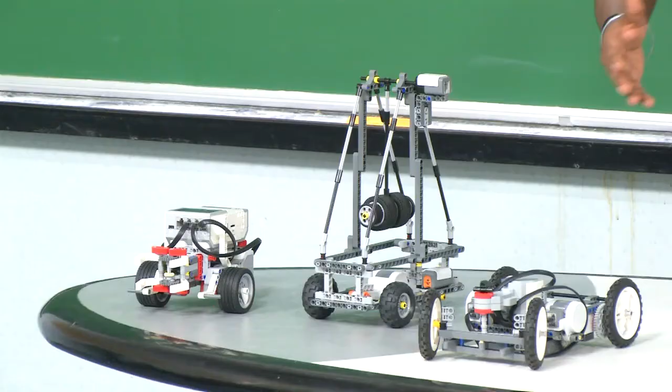In the following series of videos, I'll be explaining a few control systems lab experiments performed using the LEGO Mindstorms kits. These kits are highly reconfigurable and hence can be used to design various experiments across different domains. They are also not very expensive. Also, they are very portable and user-friendly. Thus, they can be taken by the students to their dormitories.

A creative student will be able to design his or her own experiments in order to get a more in-depth understanding of the curriculum. Also, these kits induce curiosity and excitement and thus provide for an enjoyable learning experience. The first experiment that we'll be looking at is controlling a servo motor using the LEGO Intelligent Brick.

So what is a motor? That's the first question that we must answer. A motor is a device, as you can see, that converts electrical energy into mechanical energy. A servo motor allows for precise control of the angular position using a rotary encoder for feedback.

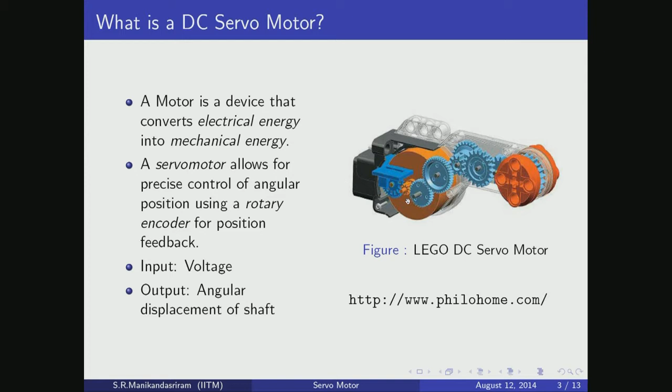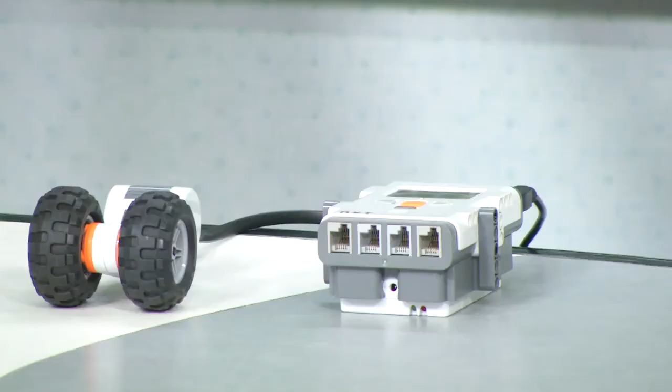Now, it is well known that a DC motor is a linear system. A linear system provides a sinusoidal output when excited using a sinusoidal input waveform, with perhaps magnitude scaling or phase shift. So, we need to verify that this motor is a linear system. In order to do that, we will write a Simulink program and run it on the NXT brick.

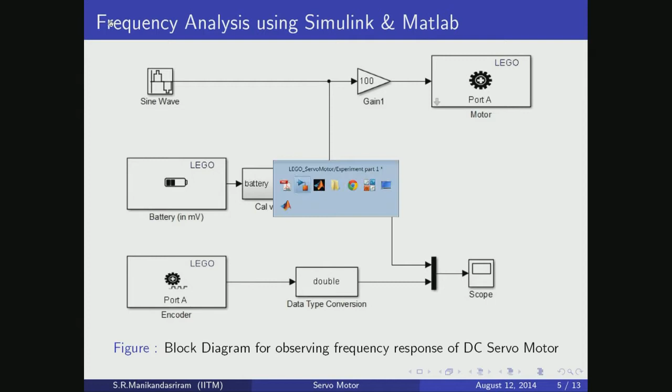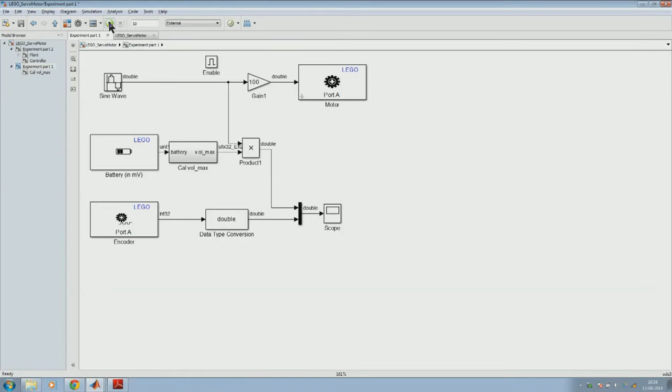So, let me show you the code in Simulink. As you can see here, we generate a sinusoidal waveform and give it to the motor. And we read this motor response and log it using the scope block. To run it on the device, first we will have to turn on the NXT brick using the orange button. Once it is on, we will have to press the play button in the Simulink program.

Now that we have completed the experiment, let us observe the results using a MATLAB plot. As you can see, there is magnitude scaling and there is a phase shift between the two sinusoidal waveforms. This proves that this is a linear system. We can repeat the same experiment for different values of frequencies and tabulate the results. With this data, we can obtain the Bode plot of this system.

As you can see, there are two asymptotes. For lower frequencies, there is a 20 dB drop per decade, which suggests a pole at s = 0. And for higher frequencies, after approximately s = 13, there is a 40 dB drop per decade. Hence, we can conclude that the poles are at s = 0 and s = 13. This is verified by the phase response, which tends to -90 degrees for lower frequencies and -180 degrees for higher frequencies.

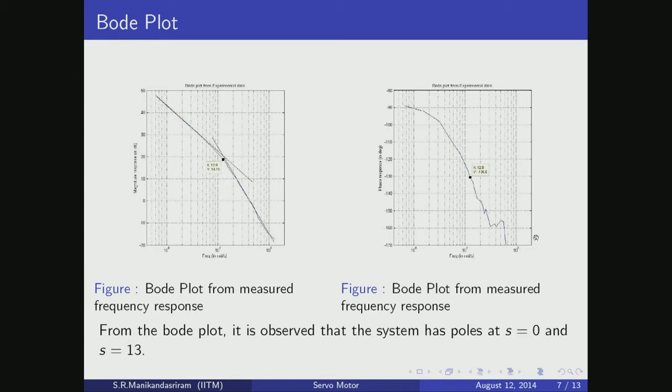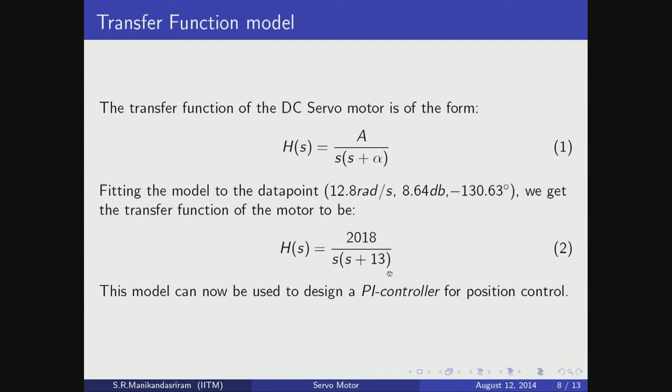Now, we need to find the value of A. In order to do that, we can fit the model to one of the data that we have captured before, say the response for a 2 Hz sinusoidal waveform. By doing that, we can obtain the value of A and thus the complete transfer function model. With this model, we can design a controller to get accurate position control.

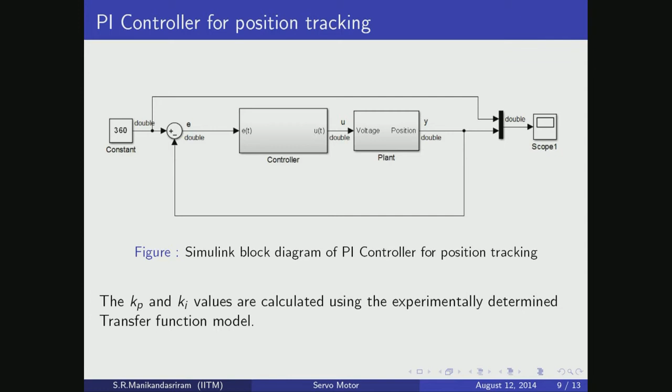It can be a PI controller, a PID controller, or any other type of controller. In this video, we will be designing a PI controller. You will be familiar with this block diagram of a unity feedback configuration. Expand the controller. As you can see, it's a PI controller. The only thing left for us to do is to find the values of Kp and Ki.

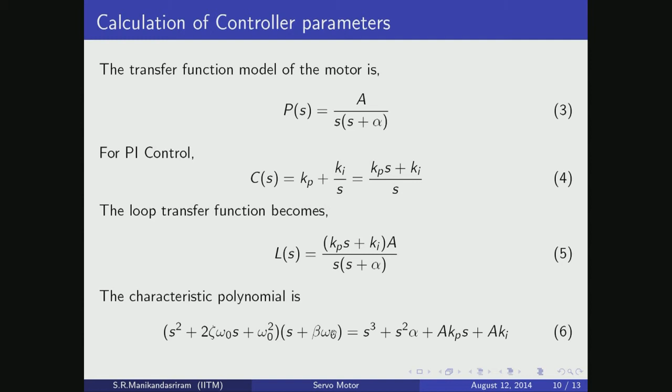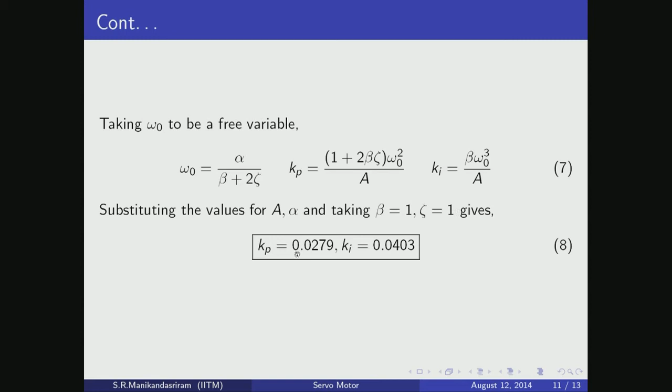As you can see, a transfer function of a PI controller would be of the form Kp + Ki/s. By obtaining the characteristic polynomial of this system and by comparing it with the standard third order characteristic polynomial, we can obtain expressions for Kp and Ki since we know the values of A and alpha, and by taking beta and zeta equal to 1, we get these values for Kp and Ki.

Now that we have designed a controller, in order to assess the performance of the controller, we need to implement this on the system. So, I have set the values of Kp and Ki. Now, let us run this on the system. As you can see, I have given the step input of 360 degrees. So, we expect this motor to turn by 360 degrees and stop.

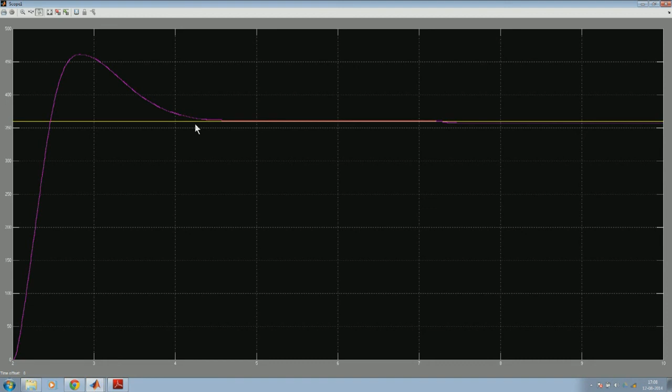As you saw, the controller caused it to overshoot and it corrected the error. There is a considerable overshoot and there is some settling time. In order to further improve the system characteristics, you can tune the PI parameters. This concludes the first video.